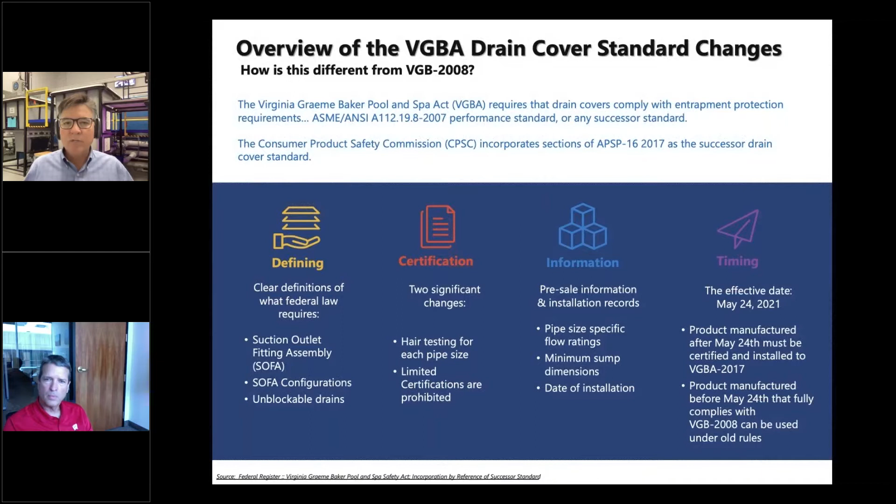So before, follow the old rules. After, you follow the new rules, and by after, it's what's marked on the drain cover. So that's high level—I'll cover all of that again in detail, because those are the critical things that I hope you take away from this.

So some of the new definitions: suction outlet fitting assembly, you can see here it's all the components to attach the cover to the finished surface of the pool and individual suction system—that's the screws, the fasteners. If it's a multi-part drain where you have a cover and then a riser ring, or it could be a cover and a vented riser ring kind of a thing, all of those parts that come with it, you must follow the instructions for it to be a legal federal installation.

So the SOFA configurations, I touched on, a manufacturer or registered design professional. I won't go into detail on registered design professionals, because they know who they are and they know they should have a copy of this standard and be following it, because registered design professionals can design large drains for water parks.

If it's not large, in other words if it's a blockable drain, it can only be certified by an NSF, a UL, IAPMO, that kind of thing. No engineers can sign off on it. Plan reviewers can't approve deviations, because these are federally regulated products.

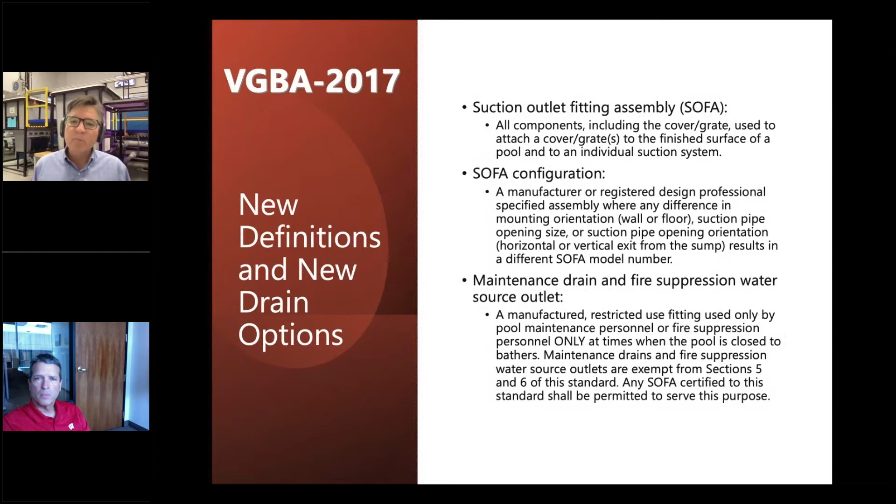So the key here is in both of these cases, we're really about protecting the opening. And so it doesn't matter—if you can find a drain cover that fits and that has a big enough opening for what you're trying to do from an engineering point of view, those are completely legal. So it just gives us some new options in the marketplace.

So, product specifications—this is a quote from the standard, annex in the standard: to assist users in selecting the appropriate cover/grate for the application, the standard now requires certain information to be made available prior to users acquiring the physical product.

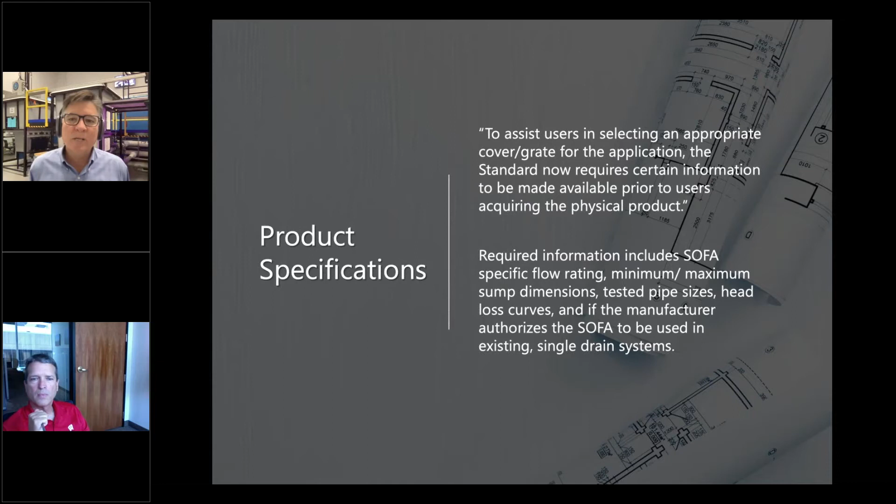Often there wasn't enough information in the sales sheet, online, or even at the distributor, so you didn't know what the product would work for unless you looked at it—it would have a flow rating on the surface. But the bottom line is this will give us as an industry the information we need so we can install the appropriate product for the system and comply with federal law.

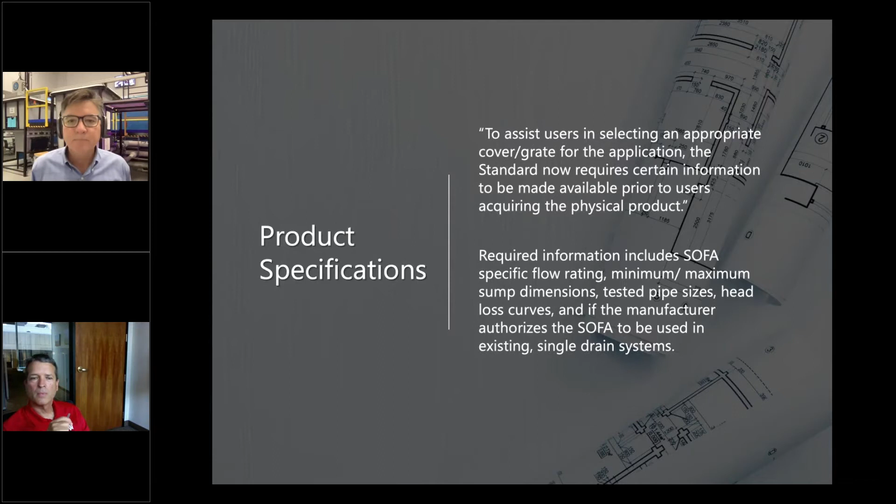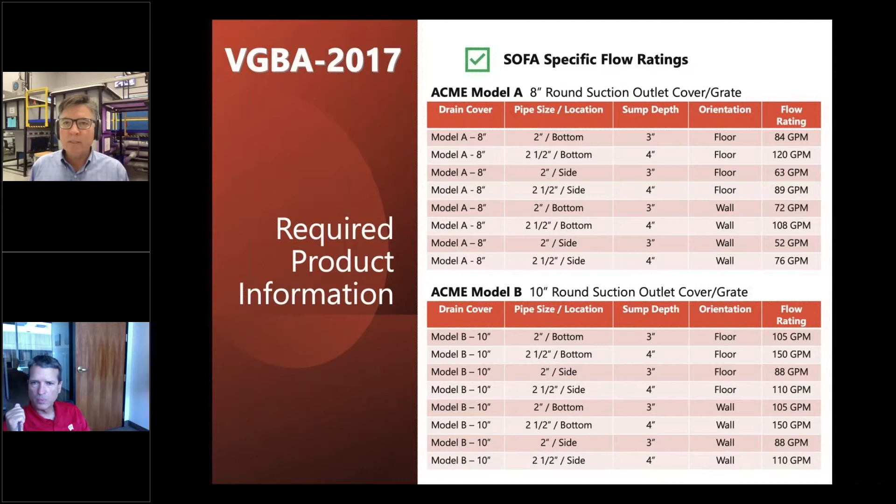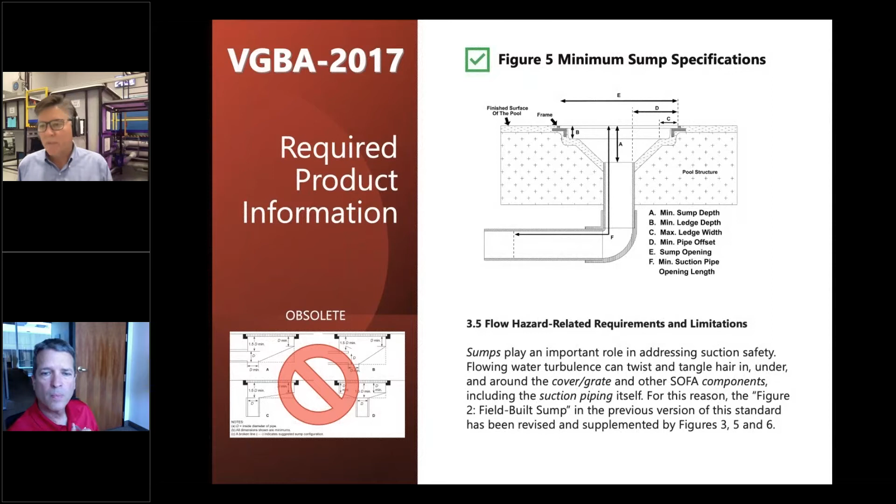When we get to the Aquastar section, I'll show you the difference between a zero sump and some of that with a little more detail. But now, a lot of manufacturers will continue to use, I'm guessing, figure 2 on the left, and that's absolutely okay—they just have to document those sump sizes and provide a bit more detail. If you're using figure 2 sumps, it's more than 1.5 pipe size diameters. Please notice the edge, the D1 in the upper right-hand corner, that's got to be 1 pipe size shallow. So when you look at figure 5, the big picture, that does not meet the requirements of the old figure 2, because up there where you see B, that's not 1 pipe diameter in this illustration. So again, figure 2 is gone—manufacturers can still use it, but they're going to provide you more dimensions to go with that. And I'd say that's the biggest change, because it's impacting, we have to design and test everything.

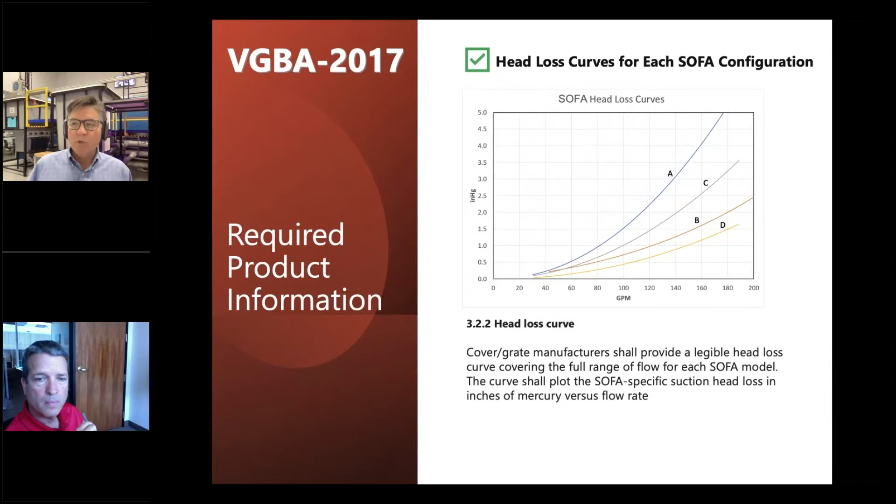If you're not doing that, you're just looking at the max flow of the pump and sizing drain covers, and you don't need this. But it will be something that has to be provided by manufacturers, and this also has to be provided in advance of the sale, so before you buy something, you know how to design.

So, unblockable - this should be familiar territory for a lot of you, if not all of you. But I just want to recap, because this is now clarified clearly in the federal law.

An unblockable means that the 18 by 23 with 4-inch rounded corners blocking element - representing the chest to hips area of the 99th percentile man - if that body blocking element does not shadow the channel drain, whether circle or rectangle, doesn't matter the shape, and some of the drain sticks out under it, then it's classified as unblockable under step 1 of the VGBA 2017 standard.

The second step is when it's blocked at its maximum flow rating for the cover, because it doesn't matter what's happening underneath it, then that sets the maximum flow rate. So flow ratings of drain covers are the lower tested value of either the body block test we're talking about here, or the hair test, whichever gives you a lower flow rating.

And that's why the hair test drives lots of different flow ratings for different size pipes and sumps and all of that. So if it's blockable, that's where for new construction we need the dual drains or more.

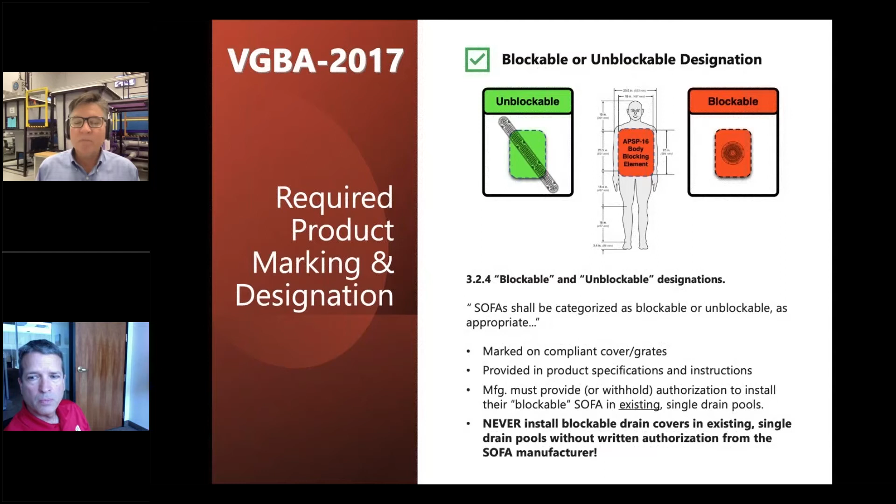Not all manufacturers are comfortable with the secondary devices concept, and they don't want the liability of having their product installed in a way they are not comfortable with. So again, that's a very important thing to look at before you purchase a blockable product.

So now, what does this mean for you as a company or individuals? Basically, here is the fork in the road. Number one, this is what we really want you to take away.

When you look at the drain on the left versus the drain on the right, they appear identical - certainly the plastic shape is the same - but one's got a teal dot, the other's got a dark blue dot. The difference is the one on the left says VGBA 2008, and the one on the right says VGBA 2017.

The one on the right has lots of new instructions and flow rates and pipe sizes and sump depths. The one on the left just gives you a flow rating for floor and wall - it's just going to say 170 gallons a minute floor and wall. That's all it's going to give you.

The key here is when you start to receive these products, you have to literally look at what do you have in your hand? What are you going to put in the pool? One of my heartburn concerns is you could have the one on the left and the one on the right from distribution, and that's kind of the messy thing we're going to have to work through.

The reason being, as I mentioned earlier, the 2017 version of the VGB standard went into effect for manufacturers on May 24th of this year. Right now, behind me is a warehouse that's got lots of product from the old standard, and new product is rolling in under the new standard. We're going to ship out all the old stuff first, and then we will start to ship the new stuff.

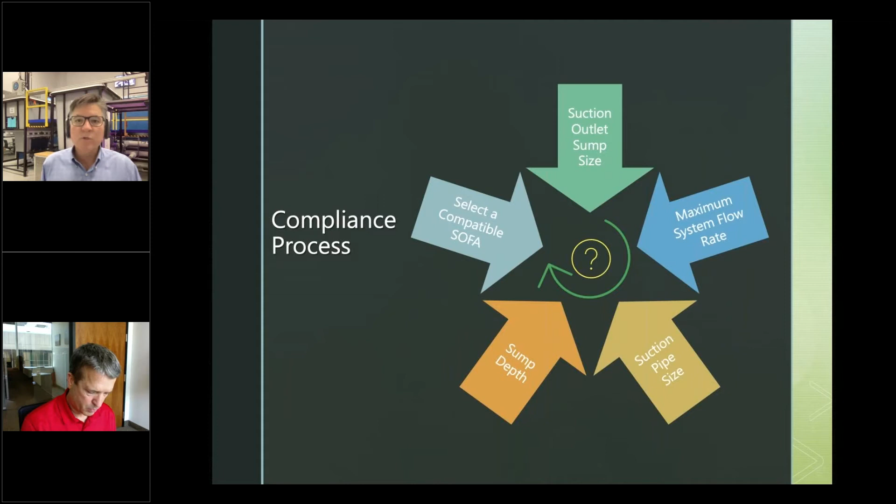Here's a little bit of important things. This enforcement here is for public pools. So if you see an old flat drain, certainly if a missing cover, those we know are always deadly, very, very risky, versus a proper cover installed.

When is it, if it's a VGB 2008 cover, is it legal? Well, you need to know when it was installed, and we know historically that the public health departments and certainly the CPSC, when they do their limited enforcement, they are accepting invoices. You know, it was purchased in April of 2018—that's close enough to prove that you can use that historically.

If they're expired or certainly broken or missing, then if it's a public pool under federal law, it's got to be closed immediately until that repair is complete. If it's a residential pool, there's no federal oversight, but we would encourage you to encourage the property owner: hey, you got a hazard, let me give you a quote on how to fix this.

In the meantime, don't swim with the pump on. If it's a flat cover, if it's a missing cover, don't get in the pool, because you can have limb entrapments and things like that. Common sense applies, but nonetheless.

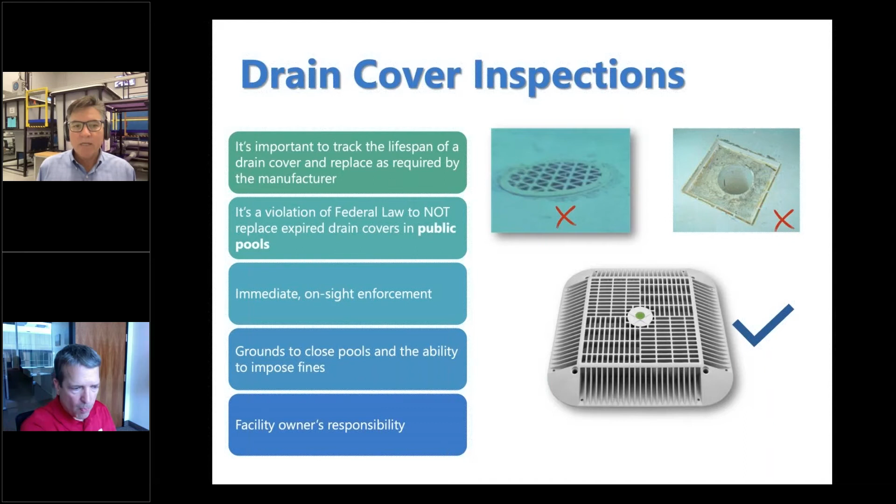And all of that is the property or facility owner's responsibility. So we as a trade, it's illegal for us as manufacturer to make non-compliant product. And if you're doing the installation of stuff, you have to follow the instructions in federal law. But if you're not touching it, then the responsibility for VGBA compliance is on the pool owner operator. And again, that's not new.

Neither is this compliant suction outlet fitting assembly flow rating. So the system, your dual drains or three, or your unblockable, must have a flow rating that's higher than the maximum system flow rate, and it's pipe size specific. That's based on 100% of the flow going through the drains.

Skimmers are designed to catch debris. They plug up, diverting the flow to the floor. Gutter overflow pools, if the water level drops, then 100% of the suction goes to the floor. For that reason, when you're calculating VGBA flow rates, you assume your skimmers or gutter overflow systems are not operational.

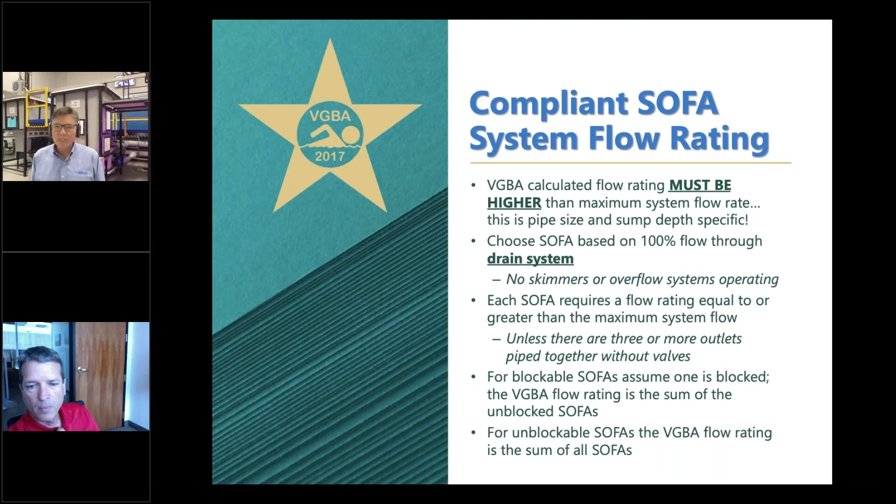Then for single or dual blockables, you assume one is blocked and the remaining opening is your flow rate. If there's 3 or more, again, you just assume one's blocked. Unblockables, you get to add them up—let me just show you this visually, it's a lot easier to understand.

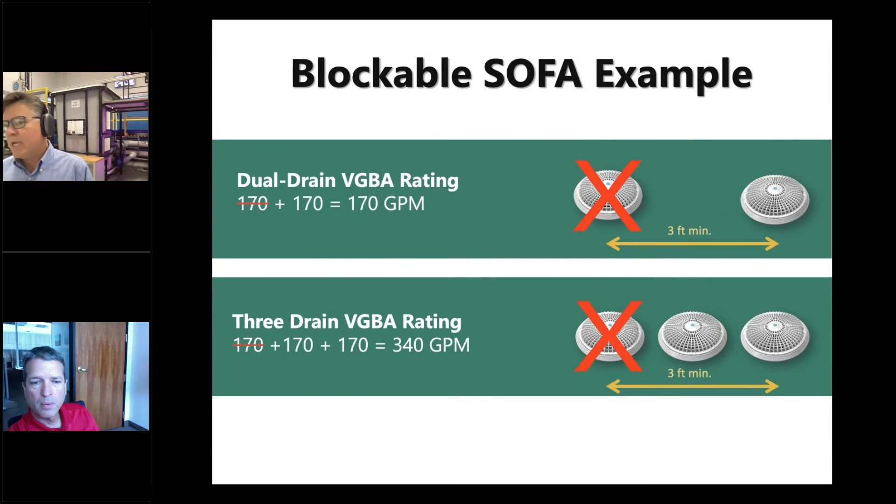This is probably nothing new to any of you, I would hope, but the classic 3-foot minimum still applies, measured center to center, and you assume one is blocked, so the flow rating of this dual drain system on top is 170. If it's 3 of them or more, you assume one's blocking, you just add up the others. So those 3 in a row would be compliant because a 3-foot separation under federal law, ANSI, PHTA standards, is measured to the outermost center to center.

Now, when we look at unblockables, here we've got 3, but we don't assume one's blocked because each model is tested with a body block, so its flow rating—this 200 gallons per minute, let's say in this example—these flow rates vary based on how many pipes you connect and all that too. So these are affected by the changes. But in this case, you just add them all up because each one's flow rating is based on them being blocked. So unblockables are very conservative drains, if you will.

Obviously, they're bigger. Personally, I think they look nice. The big advantage with them, and I'd encourage everyone to consider these for residential pools or all pools, is they're the only ones that can be flat and flush mount, because openings stick out from under the body block.

So if it's a blockable drain and it's flat and flush mount, it fails because the blocking element sticks to the pipe or to the cover, and it's over.

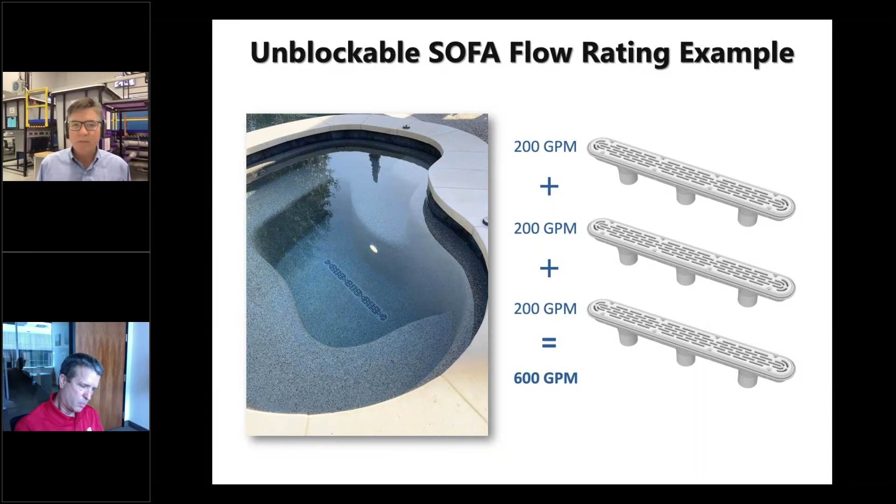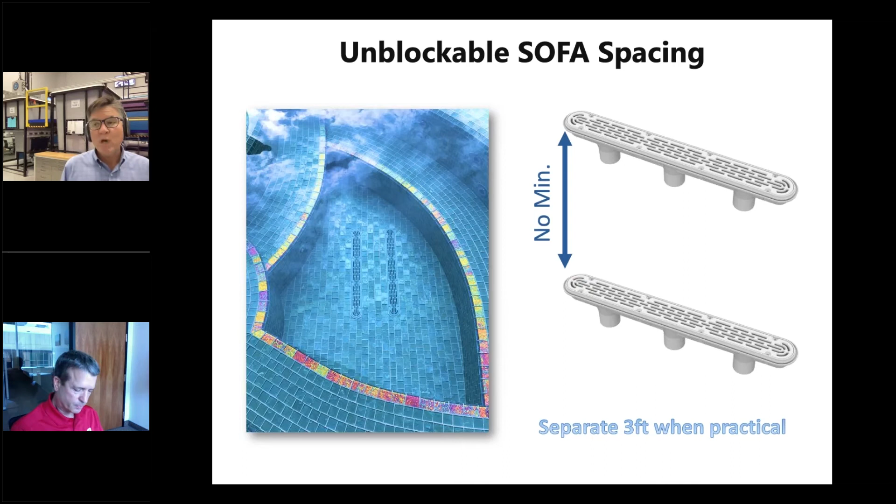On the note of a 3-foot separation for unblockables, there is no minimum spacing. In the picture, you can see they're closer than 3 feet. That said, if you're out on the floor of the pool and you have room, please keep them 3 feet or more apart, just so we don't drive plan reviewers and inspectors crazy. If you've got the room, space them out. It might look nice, but you do not have to, as this example shows.

Here's one of the things we've been using, maximum flow, as a shorthand—basically saying, okay, I have a drain cover rated for 170 gallons a minute, my pump will only do 160, so I don't need to worry about TDH. But if you get into a situation where the max flow of the installed pump, say a 3 horsepower variable speed pump, exceeds the flow rating of the drain cover, and you don't want to retrofit, here's how you can validate your flow is okay.

You would measure TDH with a vacuum gauge and a pressure gauge—there are resources to help you with this. So you measure the TDH, and in this example, let's say we came in at like 48 measured TDH. You go across to the specific pump curve, drop down, and it'll give you the flow rating. So the max flow of this pump curve is, let's call it 120 to keep it simple, but in actuality the system is only operating at 90. So if you had a drain cover rated at 100 or 105, and there's a bunch of 8-inch drains in that range, there'd be nothing wrong. This is fine—you just can't use the max flow.

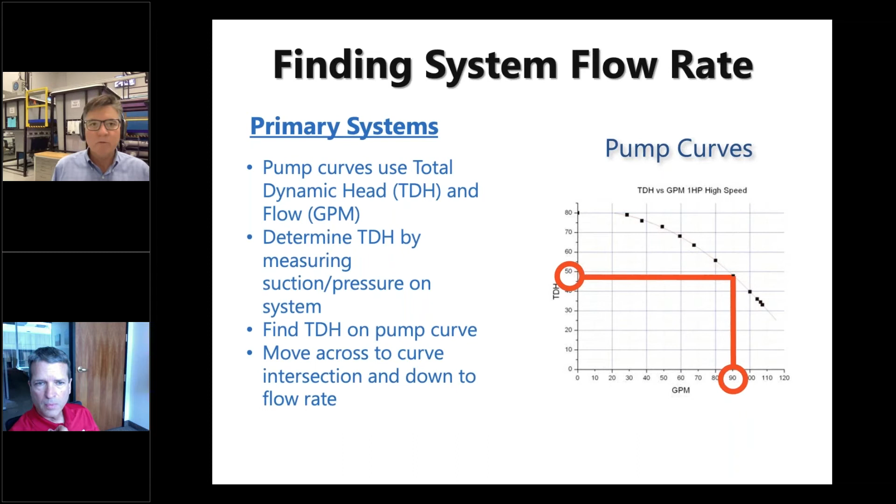In public pools, often health departments are looking at max flow. I think they're going to find that that's overly restrictive once we get into all these different pipe sizes and sump depths, but we'll take that on one step at a time. The PHTA will be the point lead on educating building officials and health departments, and hopefully we'll get them to understand sometimes max flow works, but not always. Let's not require a backhoe to bring a pool into VGB compliance.

Available resources: the PHTA, who are the publishers of this standard—as you probably know, they merged APSP and the National Swimming Pool Foundation a couple of years ago to form the Pool and Hot Tub Alliance. There's their website. But relative to compliance with drain covers, your number one source is the drain cover manufacturer and their certified listing. It takes two documents—the instructions and specifications, and whoever listed them, NSF, UL, whatever the case may be—so that you can prove this is a federally compliant product.

Number two, definitely start looking at product specifications, and then installation instructions is where you're going to get the most detail. I can tell you we have those done for all of our products, but they're not public facing yet. We're not going to open up that side of our website until we're actually ready to ship the product, so that way we don't confuse the market any more than necessary.

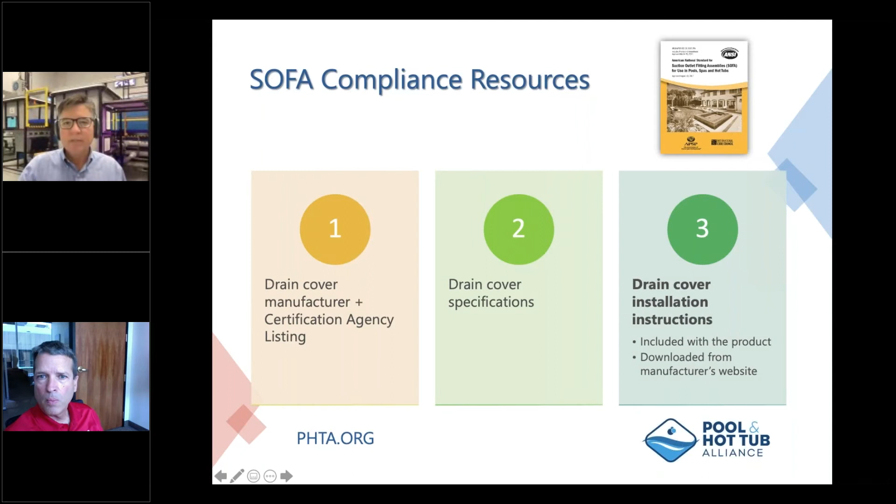Oh no. Hello, hello. Well, you can hear me, but the webcam seems to have slowed down. Let me try one more time. Here we go. Okay, we're back up. Sorry about that. Here we go.

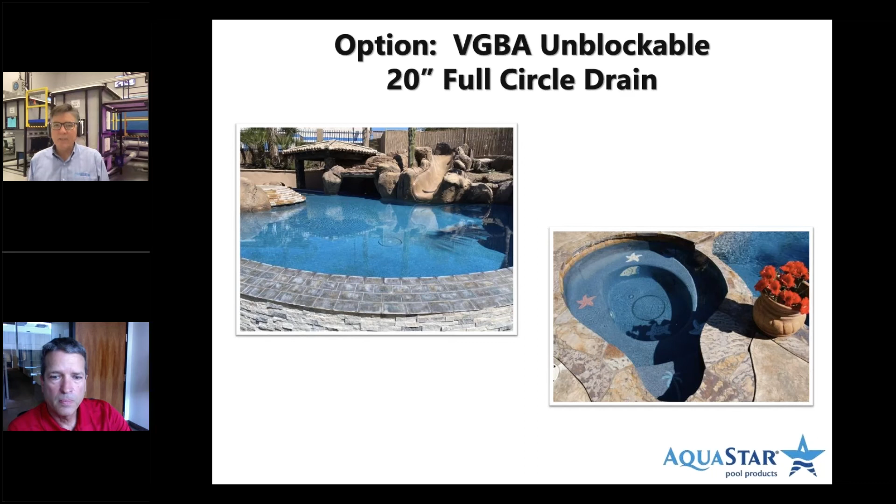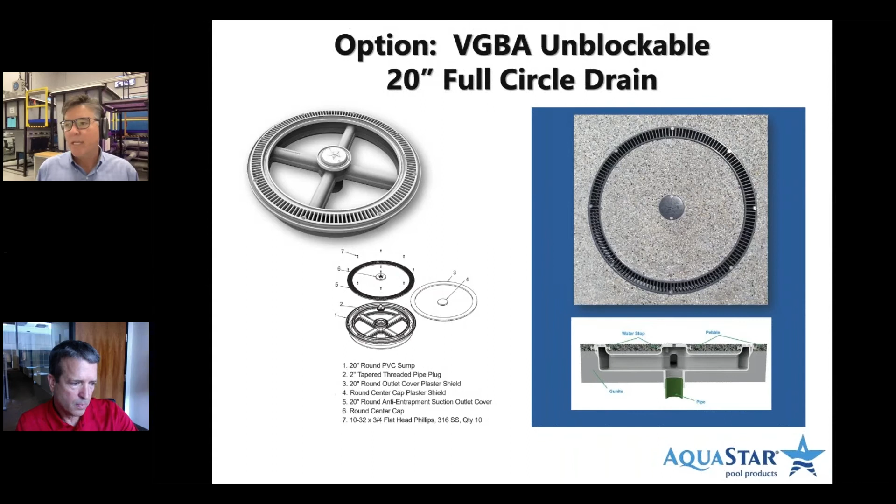The reason it's safe from both hair and body block is you just can't block this circle, and it's a thin little line. The other thing is hair can't reach the center port, so it's a single port outlet with the pipe connection in the center, and that makes it a really nice option for looks and safety. Here's a little bit closer look at what it looks like.

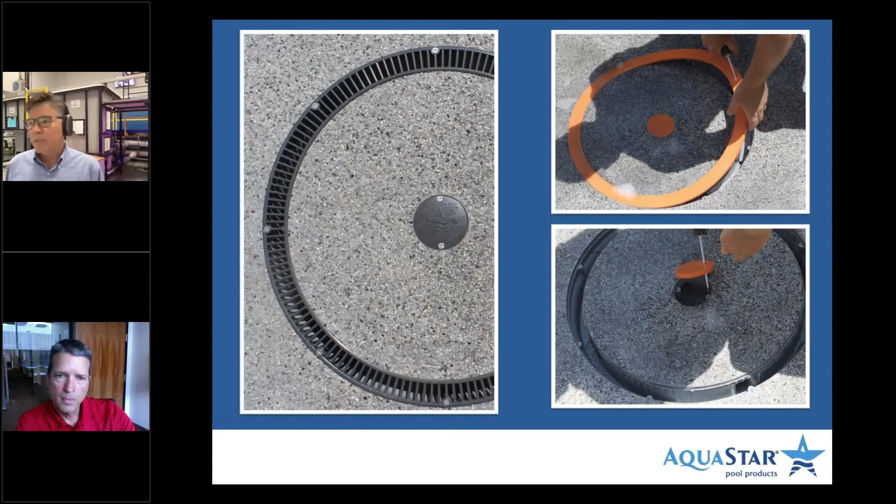It comes with the orange plaster caps for pebble, because that's for pebble and exposed aggregate, so that you don't have to clean out pipes and all of that. So it's a nice little system.

Here we have our family of retrofits. They're obviously designed for squares, so it's the 9x14 retrofits to 9-inch squares, and it's both the 1-inch deep and the 3/4-inch deep that have been around for decades. Comes with a mud frame for new installation.

One of the intriguing things about both of these—one's a 9 and one's a 12, they look the same—is that if you have a damaged mud frame or things are stripped out, this can be attached directly to a concrete pool with these brass anchors you see here. So you can mount it to concrete. I suppose you could try with vinyl and fiberglass, but we're not recommending that—and just for clarity, that was a bad joke.

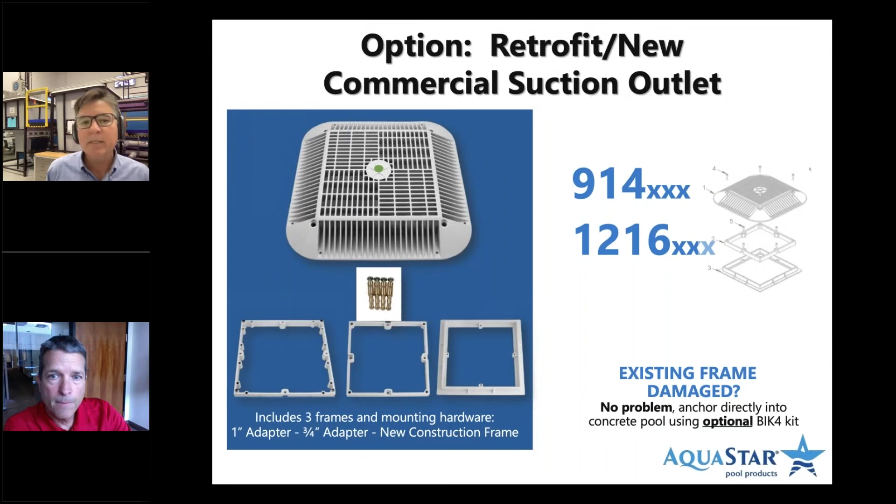Here's a related product. This is the A10 RCFR that you've seen in a couple of previous slides, and here you can kind of see an example. Now, these are real numbers. So if we have the photo with a 0 sump depth and an offset of 0, this is kind of the worst case scenario. We've also tested this with 2 pipes, like 1.5 and 2-inch, so there'll be flow ratings on that.

This is currently certified by NSF. Here you see 3-inch pipe, 3-inch sump depth, we have 170 gallons a minute, and that's with the 3-inch pipe in the center, like the illustration you see to the left. That flow rating is 170. If you do what's in the picture here, that flow rating drops to 138, and the reason is a lot more of the hair goes into the pipe, and because it's not centered, that changes the swirling and vortexing. So this is why that figure is so important and why pipe size is so important.

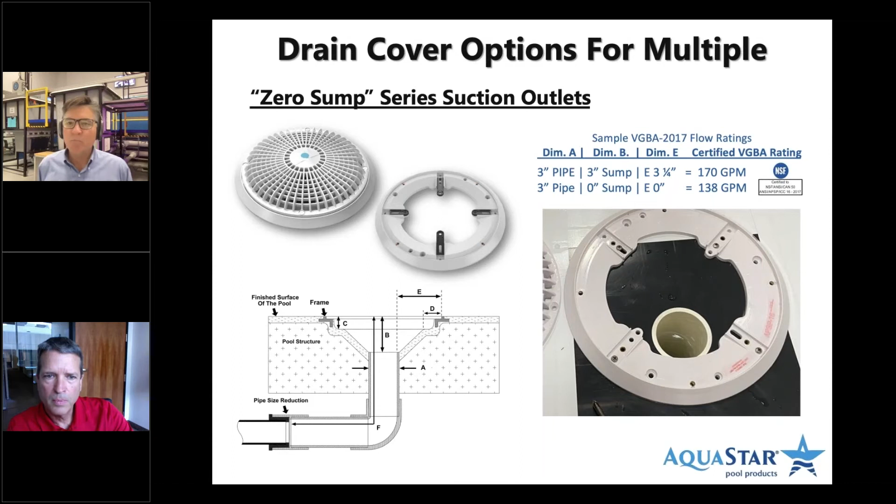So with that, we made it to the questions and answers on time. Sometimes even a blind squirrel can find a nut.

So with that, Scott, do you have any questions for us? I've got so many questions, and we had so many attendees that we'll never get to even half of them, but we're going to give it a go.

I wanted to just reiterate again one of the key points you made: check the instructions that come with new drain covers to ensure you're installing them the right way, in compliance with the standard in effect for that drain cover. I just wanted to touch on that one more time—we'll probably get to that in the questions too. I'm going to do a story on this for Aqua in the next 4 to 6 weeks. This stuff's really important, and we'll be trying to hammer this in Aqua to get it out there to the industry as best we can.

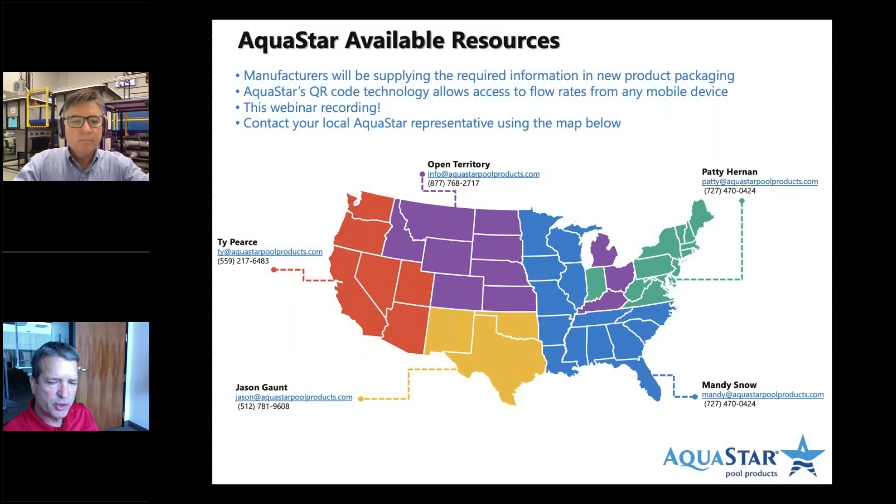One of your slides said figure 2 was obsolete, but I see instructions that still show figure 2. Is it okay to follow those instructions? Yes. So if the manufacturer's instructions provide it... let me try to jump back into the slide.

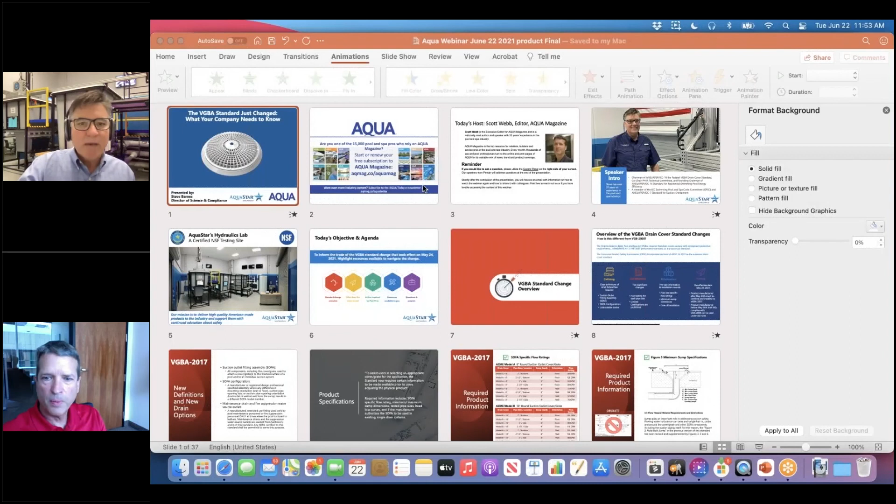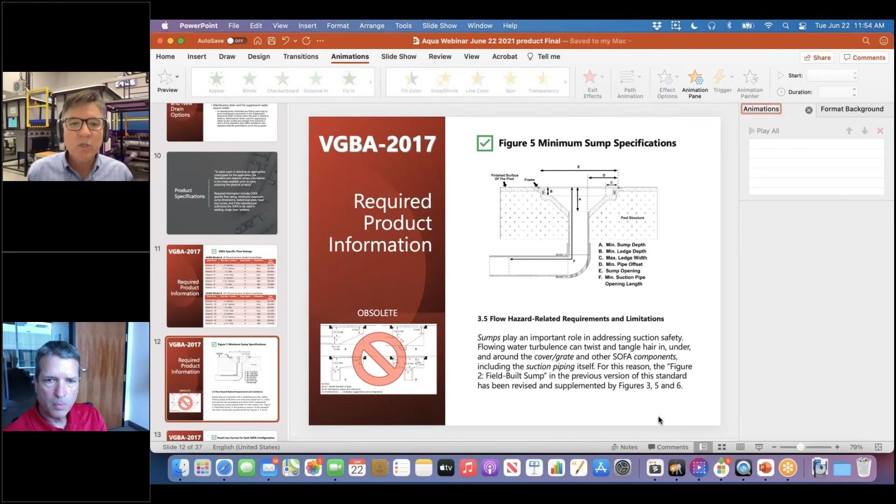What I want to do is go to that slide for you. Here it is. This is the one we were talking about. So on the right, figure 5 is the information the manufacturer needs to provide you if it's a field-built sump, so you can make it. What they can't do is the figure 2 on the lower left, that is obsolete insofar as it's not in the standard.

In the original standard, it said you either follow the manufacturer's instructions or you could use a sump in accordance with figure 2. Well, that wouldn't have been tested, and we know through experience now that that flow rating may not have been appropriate for a figure 2 sump. For example, if the cover was tested on a great big deep sump, 17 inches deep, like a big fiberglass public pool sump, then to put that flat grate like you see in figure 2 on a figure 2 sump would not be appropriate. It goes back to following the specific instructions.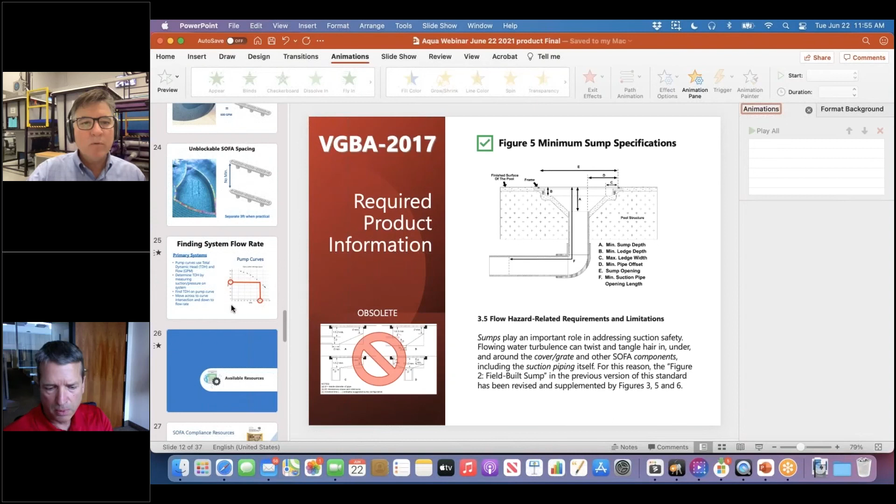Okay, I'm gonna keep that one in mind. Our health department uses the max flow of the pump when checking VGB flow rates. Can they do that? Local jurisdictions can be more restrictive, so the answer is yes, they just can't be less restrictive.

But if it's marginal, especially if you get into the big stuff, 12 by 12s, 18 by 18s, 18 by 36, the max flow of a big 25 horsepower pump, if it ran there, it would destroy itself. It would overheat at best. Public pools are designed to operate at the best efficiency.

So you'll want to work with your health department. One, if you can find a product with a higher flow rate, that's the path of least resistance. But if not, and you're just out of options, then you're going to have to go to TDH physical measurement kinds of stuff. That's where resources at the PHTA and Aquastar, within reason, can help. We can't review every single pool, but we can help with this issue, because this is one of the big transitions we're going to have to work through on marginal pools, or on the bigger pumps primarily, which can far exceed what the system was designed for.

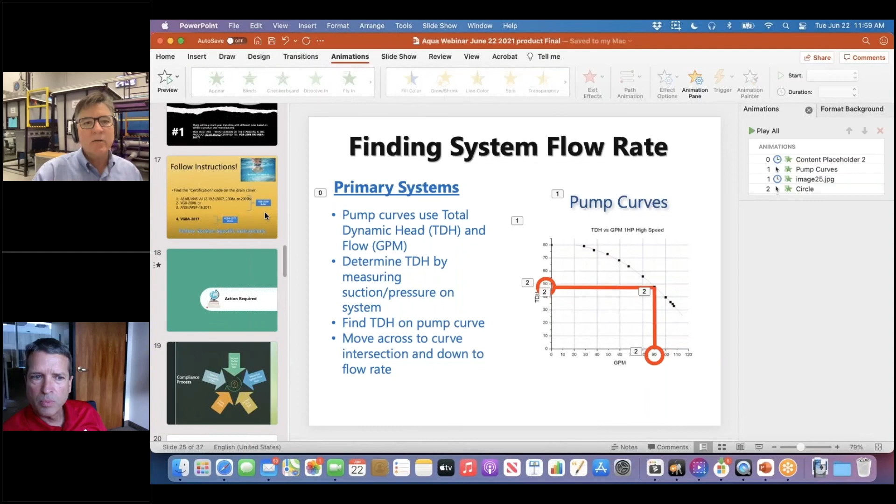There's been a lot of confusion over the years. So my drain cover says 2007 or 2008 or 2011. Those are all the standards. And then this born on date, which will be a little date plug kind of a code thing, that doesn't apply.

And one of the things I didn't mention, I should have, is one of the new requirements with the standard is it's going to come with, in the instructions or a tag attached or somewhere, it'll say this is the model number of the cover, here's its flow rating, or look up its flow rating and write it down because of pipe size and all of that. And then it has a place for when it was installed, month and year, so that you can check that. And the idea is that you save that, you give a copy to the pool owner operator.

And the instructions are going to say post this near the pump. Well, that may not be practical, certainly in outdoor settings and all of that. But there will be tools coming with the VGBA 2017 covers that will help you track that. And it's date of installation, month and year, the month of installation with or without water. The reason it's with or without water is if they're building a mansion, they build the pool in the backyard 2 years ahead of the house being complete. If they install the drain covers, they're in the sun and that clock has started. It's the sun that makes the drain covers expire, so to speak.